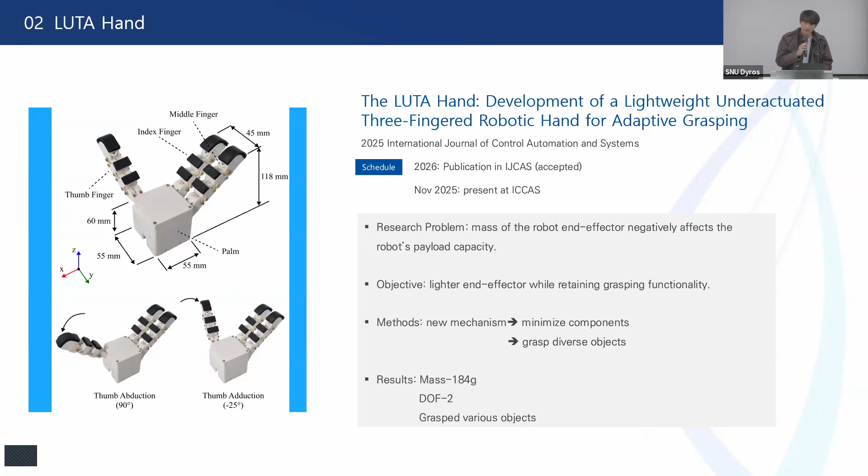To first talk about the motivation, we all know that the hand is the robot's end effector, and its mass directly eats into available payload and dynamic performance. So therefore, our objective was to reduce the end effector's weight while preserving grasp capability. To that end, we pursued several strategies that cut the part count yet retained functional grasps, allowing the hand to stay light without sacrificing performance.

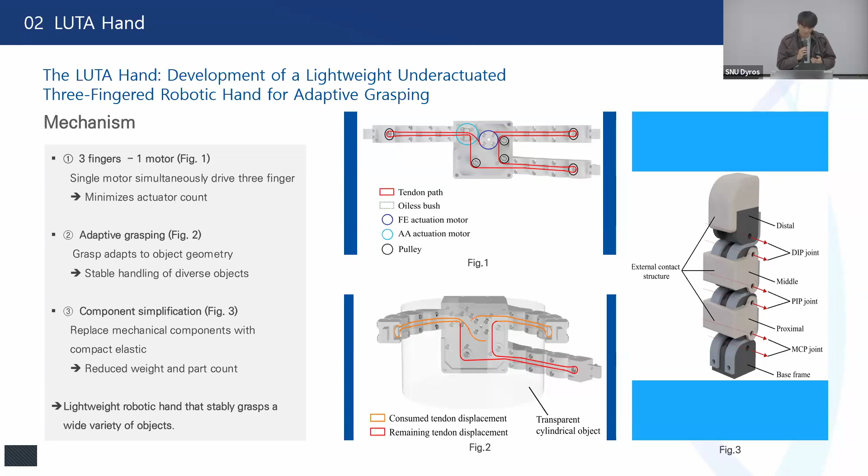Secondly, adaptive grasping was enabled. As I said earlier, there was only one motor driving the flexion of all three fingers. However, by enabling adaptive grasping, the hand could grasp diverse kinds of objects with an under-actuated system. Lastly, most of the metallic components were replaced with simple light parts using other mechanisms, which I'll talk about later on.

To talk more deeply about the simultaneous actuation with one single motor, as you can see in figure 1, the tendon starts from the motor and moves to the distal of the finger, then returns, moves to the other finger and returns, and moves to the remaining finger and returns back to the motor. Through this method, with the rotation of one motor, all three fingers are actuated.

The point of this mechanism is that the tendon force is first routed to the thumb and index. In this way, when the motor rotates, the thumb and index move first and pinch grasping is enabled. As shown in figure 2, the thumb and index move first and pinch grab the object.

When used with simultaneous routing of the tendon, friction could be a problem. However, in this paper, we used pulleys and PTFE tubes to solve this problem. In figure 1, there are about 6 pulleys embedded in the hand, and there are also PTFE tubes along the tendon paths. Using these parts, we could reduce the effect of friction.

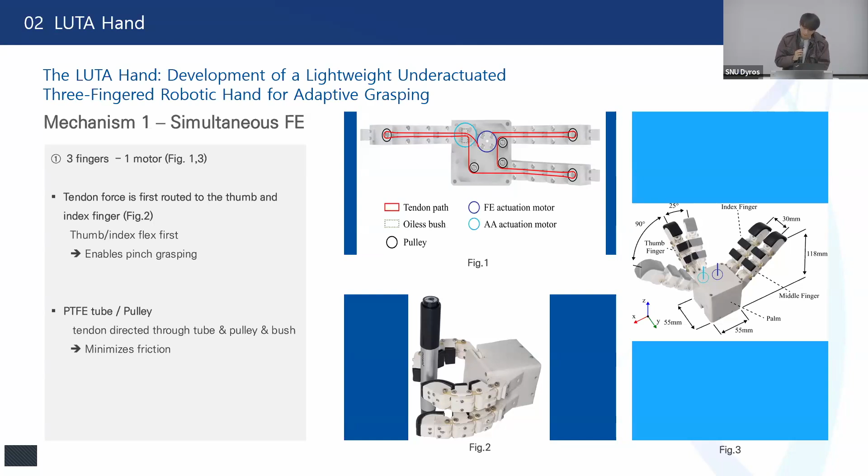This means that even when two fingers meet the object and stop, the motor still rotates and the remaining finger flexes. To talk more about this, as shown in figure 2, when the middle finger is fixed after meeting the object, the thumb and index still flex, which means that even with rotation from one single actuator, the three fingers adaptively move to meet an object. Through this mechanism, the finger adjusts adaptively to the object.

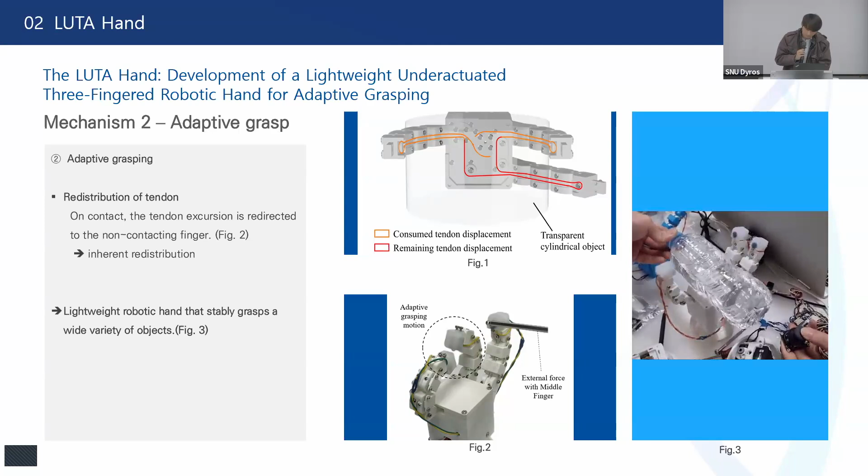So basically, two components, the TPU and lateral latex ligaments, both created a restorative force. This restorative force enabled the extension of the finger, which means there is no need for other parts for making the force of extension.

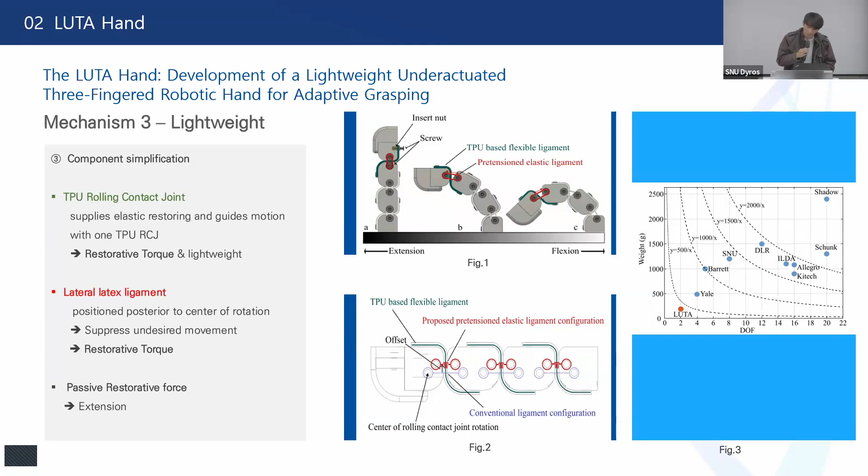To validate the hand, 5 experiments were conducted: 3 quantitative experiments on repeatability, adaptive grasping, and fingertip force, and 2 qualitative experiments on grasp taxonomy and pick and place.

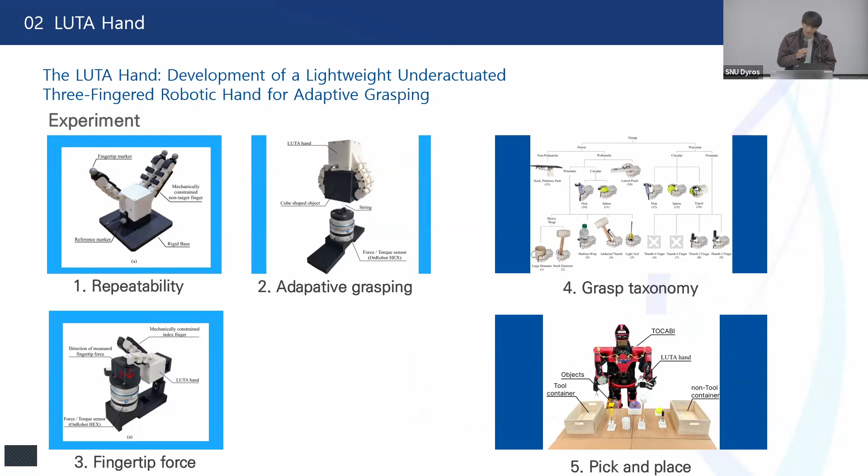For the first experiment, repeatability was checked with a motion capture system. Thanks to the help of senior Ji-hyun, the hand's position was recorded during movement. Often in under-actuated design, repeatability is a problem because the motor cannot precisely move its finger. However, the result of this experiment shows that the average offset was from 0.05 to 0.14 millimeter, which is quite low.

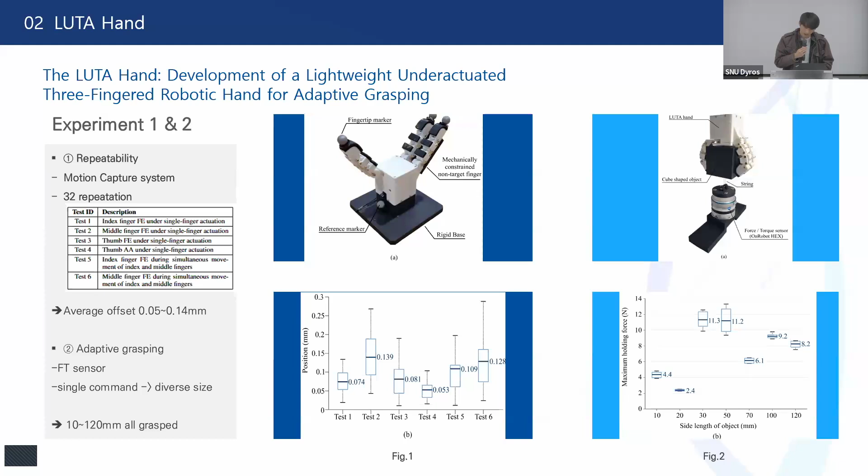For the second experiment, adaptive grasping was validated using an FT sensor. In figure 2A, the FT sensor lies at the base connected to a string, and the string is connected to the object while the hand pulls it. In this experiment, the hand was actuated with only a single command while it grasped 7 types of objects ranging from 10 millimeters to 120 millimeters. The result shows the hand could successfully grasp diverse sizes of objects with only a single command, demonstrating the capability of adaptive grasping.

For the third experiment, the payload capacity of the fingertip was validated. The result in figure B shows that when only one finger was actuated, the average payload was 5.3 Newton, and when two fingers were actuated, the average fingertip force was 9.4 Newton.

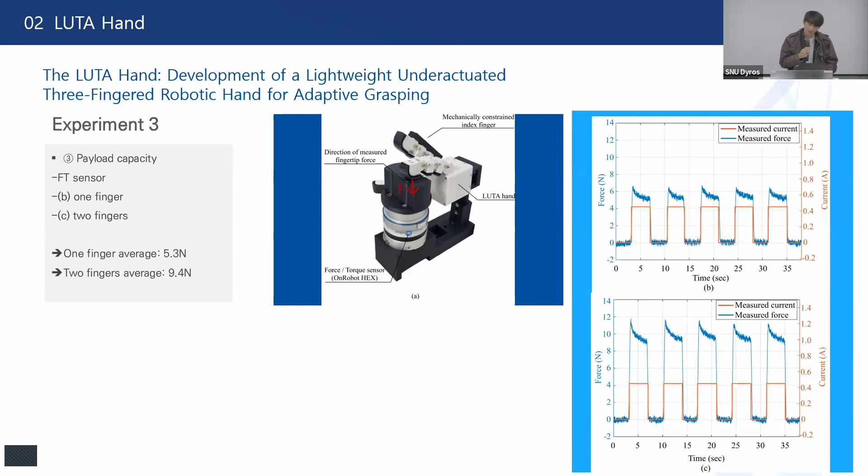For the fourth experiment, grasp taxonomy was validated. In this experiment, 9 kinds of objects were used, and this taxonomy was based on 16 grasp types, with this hand executing 14 grasp types. Out of 16, 2 grasp types were unavailable due to the number of fingers: the thumb-3-finger grasp required 4 fingers, and the thumb-4-finger grasp required 5 fingers, while this hand had only 3 fingers.

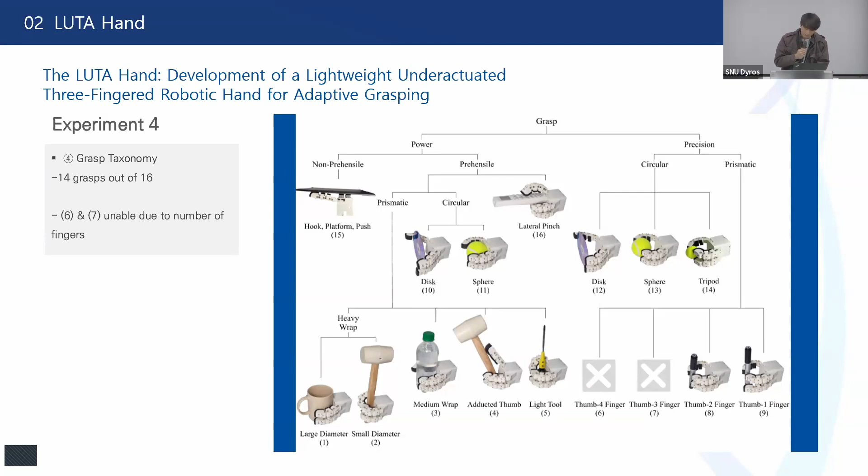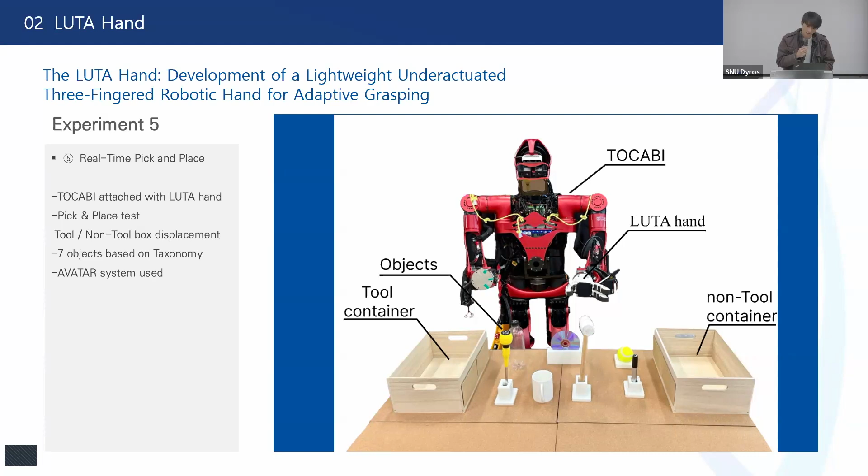For the fifth experiment, it was a real-time pick-and-place experiment. Our goal was that TOCABI, attached with the LUTA hand, would sort objects into non-tool and tool categories. With the help of senior Jae-yong, Eunho, and Dongjun, we used an avatar system to move TOCABI, and the goal was to sort 7 objects into non-tool and tool containers. There's a short video showing the result of this experiment.

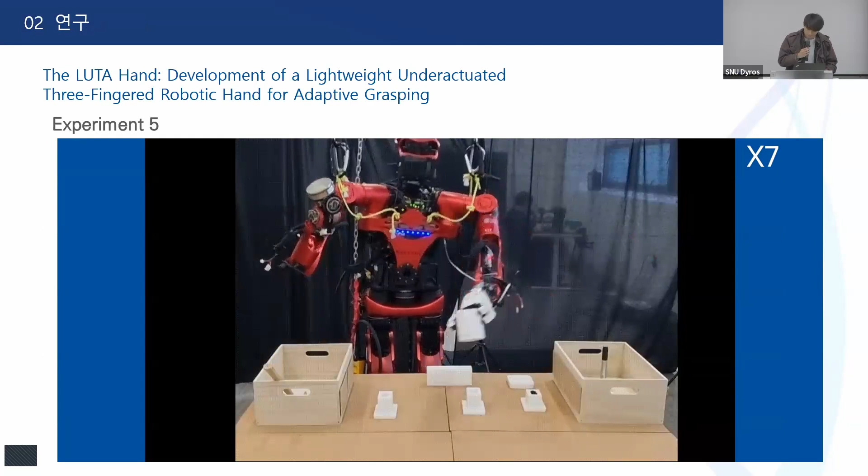The video shown earlier was completed in 1 minute and 20 seconds, and this trial was done 3 times. Across all trials, only 1 time was missed due to a missed grab, and completion time decreased across the 3 runs. The first time took about 174 seconds, the second time took about 117 seconds, and the last time took about 1 minute and 30 seconds. It consistently decreased with operator familiarization.

This result shows that depending on the object geometry, the hand could successfully execute power grabs and precision grabs while maintaining stability during whole arm motion, indicating reliable dynamic grasp performance of the hand.

To conclude, the LUTA hand is a very lightweight hand at 184 grams, with a fingertip force of about 5 Newton and a repeatability error of about 0.05 to 0.14 millimeter, which is quite low. Its grasp taxonomy achieved 14 types out of 16, and the hand was also validated with a real-time pick-and-place experiment.